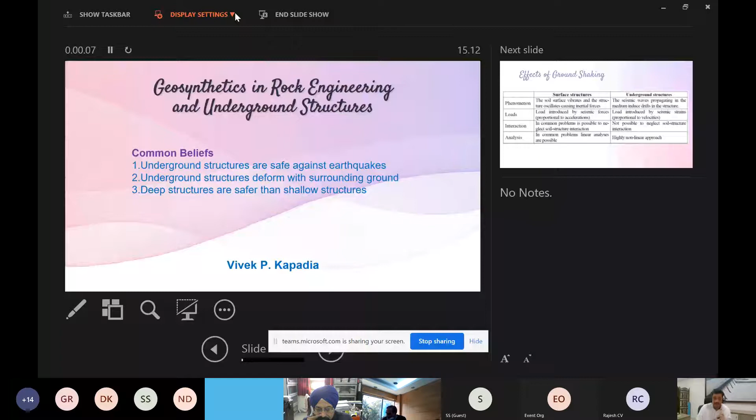And this is my full screen mode. The entire topic that has been given to me is very vast, and though I am not an authentic speaker on tunnel engineering—especially, I am a structural engineer with special experience in application of geosynthetics—I have done some work in tunneling, and that's why I will be able to share some of my experiences with you.

So in underground structures, the common beliefs are like this: underground structures are safe against earthquakes. Another belief we subscribe to is that underground structures deform with the supporting surrounding ground. And the third belief is that deep structures are safer than shallow structures. All these misbeliefs actually emerge from our codal provisions.

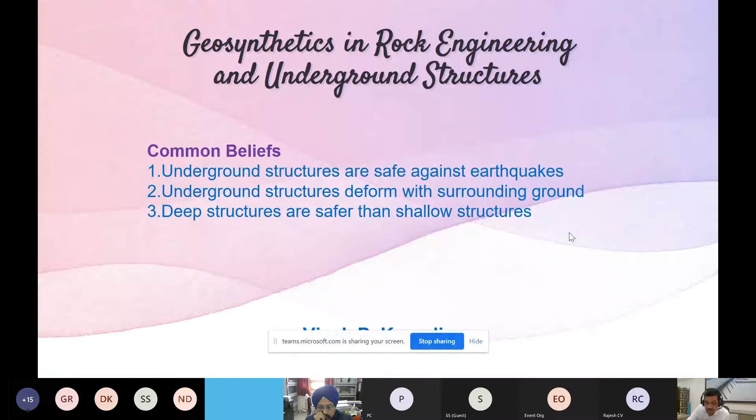Some of our Indian codes provide that buried structures are not required to be analyzed by dynamic methods, and these kinds of provisions give us wrong impressions, which is why these beliefs are nurtured in society. But actually speaking, the spirit of the code, when it says dynamic analysis is not needed, is that you should go for finite element analysis or pseudo-static analysis—these will work better for underground structures. That is the spirit of the IS code, but we don't take it the right way.

So here I am taking you through the journey of earthquakes and their effects on surface structures versus underground structures. The differences are very stark between structures lying on the surface of the earth and those buried in it. The phenomenon is that the soil surface vibrates and the structure oscillates, causing inertial forces—this is the net effect of earthquakes on surface-based structures. Whereas if the same structure is underground, seismic waves propagating in the medium induce drifts in the structure. So these are the two key differences.

From a load point of view, the load induced by seismic forces is proportional to acceleration, whereas the load induced by seismic strain is proportional to velocity. This, I think, is the most critical difference between the two. On the surface, the structure undergoes acceleration-based analysis, and when underground, it's velocity-based analysis. So this is the fundamental difference from an analysis point of view, and that's why the IS code says that when the structure is buried, it's better to go for pseudo-static or pseudo-dynamic methods.

From an interaction point of view, it's possible to neglect soil-structure interaction for structures resting on the ground, whereas it's not possible to neglect it when the structure is underground. From an analysis point of view, linear analysis is possible on the ground, whereas a highly nonlinear approach is required for buried or underground structures. Because of this nonlinearity, the code recommends pseudo-dynamic or pseudo-static analysis. This is the most important thing we need to understand.

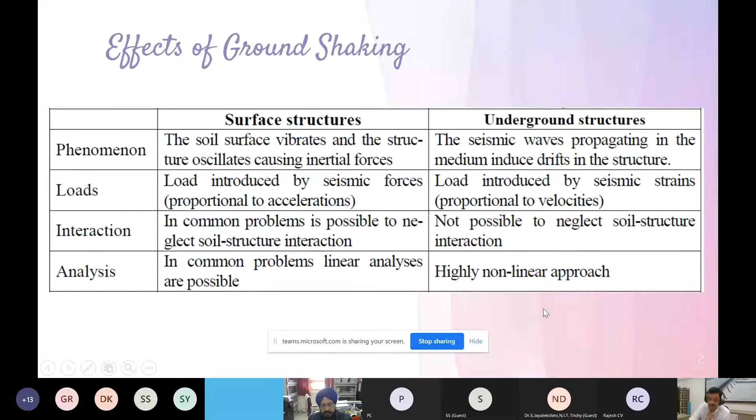So this is the disillusionment I was supposed to address at the outset. If we understand the first category of structures resting on the ground—rockfill dams and canals—these are made up of rocks. Let us start with the first set of slides now.

The geosynthetic membrane, how it is used in the rockfill dams. Usually in rockfill structures, the most critical aspect is seepage. What kind of seepage path you permit determines the base width of the rockfill dam. But we try our level best to ensure the reservoir side has some kind of sheath or impervious layer.

In the olden days, it was the concrete slab put on the face of the rockfill dam. Even dry masonry was done sometimes, but now we have replaced them completely, and we provide a geosynthetic membrane on the upstream or reservoir face. Similarly in the foundation, if imperviousness is required, we nowadays prefer basal reinforcement combined with geo reinforcement at the ground. That is how we ensure permeability is within the control or acceptability limit.

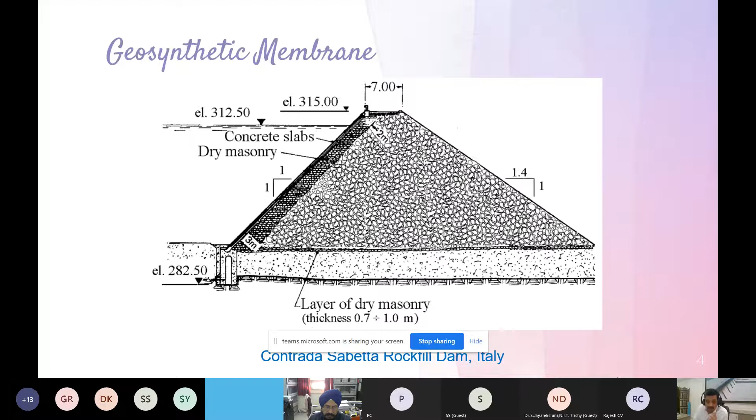This is a rockfill dam of Italy, pictured over here. The geosynthetic membrane, how it was provided, can be seen over here. The geosynthetic sheet has been covered with a concrete slab. The reason is the geosynthetic material is not very strong under UV exposure, so it was required to be covered. But the basic impermeability has been attained by the geosynthetic sheet.

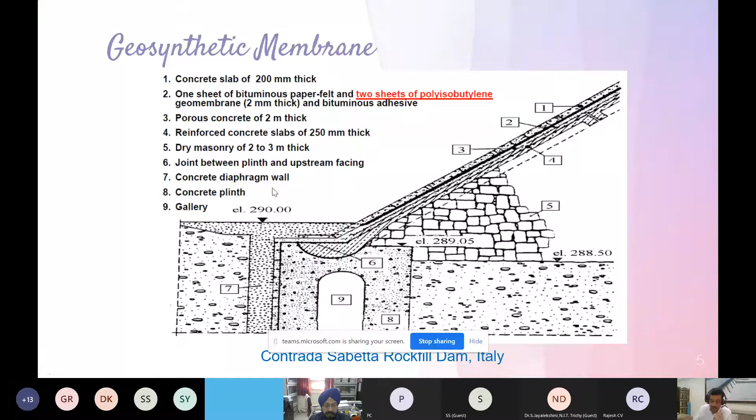In the olden days, the same material used was the bituminous sheet. Nowadays, we go for a polyisobutylene kind of sheet. Even HDPE is practiced for smaller dams, and for bigger dams we use PVCP kind of material, which is very effective.

In the rockfill dam, if we require a filter, we go for geosynthetic material nowadays. In the olden days, the practice was to use granular material like gritty material or pebbles. But now we go for the geosynthetic filter.

This is the Hans Strijdom Dam of South Africa, in which a PET kind of geotextile filter was used. With geotextile filters, both functions can be attained: filtration as well as drainage. That's why this dam has been standing for years together. It is a time-tested project with the application of geosynthetics in the rockfill dam.

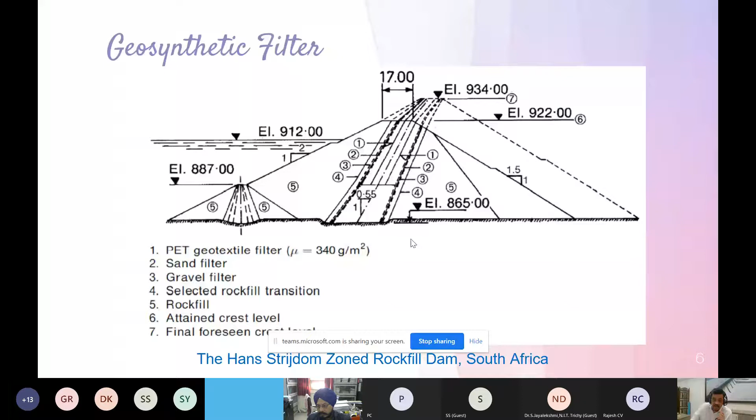Actually, the rock material is interlocked into the biaxial geogrid or the steel mesh, and that is how tension is attained into the steel mesh or biaxial geogrid. That is how we ensure the stability of the downstream side.

Then what is the net advantage? I shall take you to the next advantage in the subsequent slide, where I will show how earthquake resistant design of the structure is ensured with this kind of geo reinforcement mechanism. Sites susceptible to high magnitude earthquakes or low magnitude frequent earthquakes make rockfill dams extremely vulnerable. In that kind of situation, these reinforcements, be it of steel or polypropylene, are widely used. Even nowadays, polyester geogrids are also available for use in these kinds of structures.

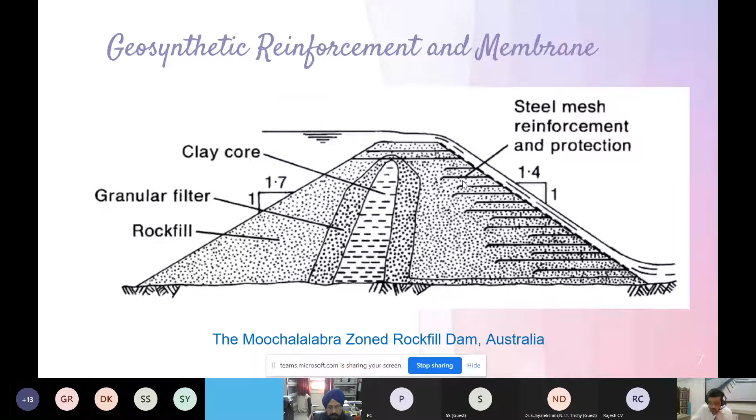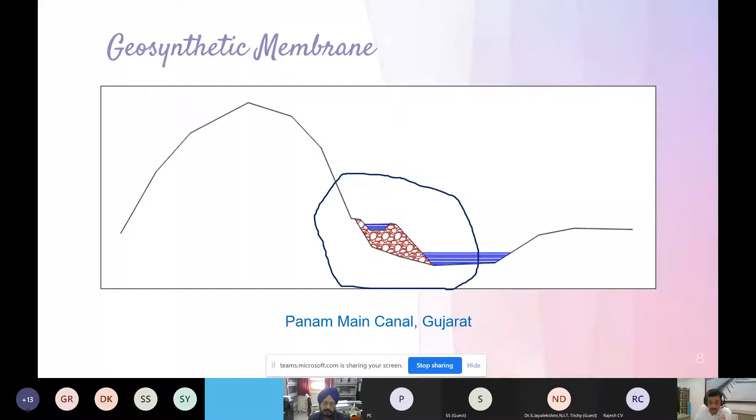I am taking you to a rockfill canal here. This is my own experience. You can see this entire rockfill canal abutting a mountain, and the material was taken from the same mountain. It is a high bank canal carrying water inside, with a significant discharge of about 35 cubic meters per second.

It is very big. Over a period of time, we observed that this entire rockfill mass, the canal, started developing voids inside, and that's why there was a big outflow over here. It was to the tune of 357 liters per second in a 100-meter stretch. So it was profuse percolation from the voids within the rock mass.

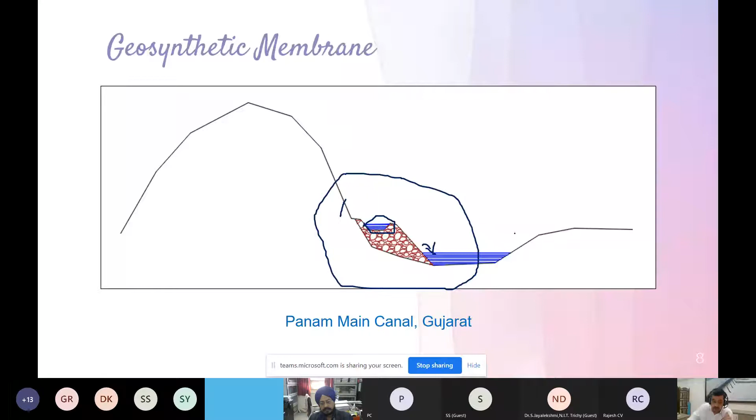So we went for geophysical testing. We found the water paths, and accordingly we chalked out our strategy. We simply put a geomembrane on the surface of the existing canal, and we put another layer of lining like this, and that is how we ensured it was a completely seepage-free canal.

Otherwise, it was a huge wastage of the water, and moreover, the stability of this outer slope was also endangered because of the path of the water developed within the embankment of the rock mass. So this is how the geosynthetic membranes work.

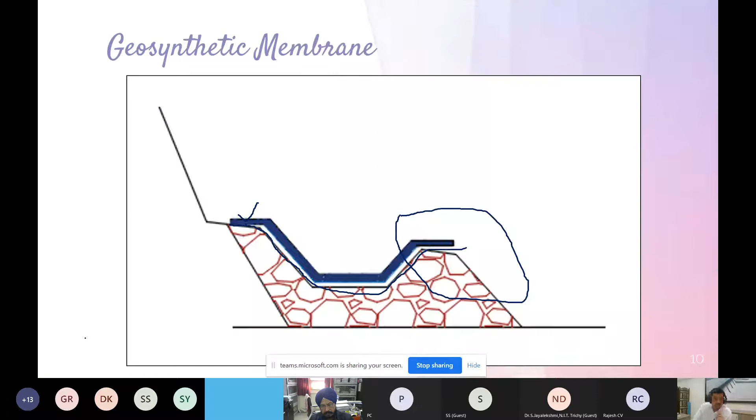Now I am taking you to the underground structures. Up till now, the discussion was focused on the structures above the soil mass or the ground. Underground structures are susceptible to high magnitude of deformations, and serviceability is a major concern in underground structures.

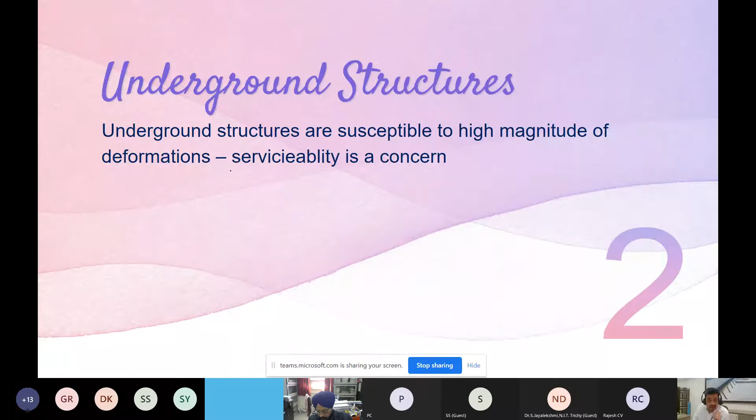I'm taking you to the crux of this matter. Suppose we have laid a buried service line, maybe a drainage line, a crude line, a gas line, or whatsoever. The mass above this pipeline, that is the soil mass or the rock mass, whatsoever the case be, this pipe is extremely dangerous.

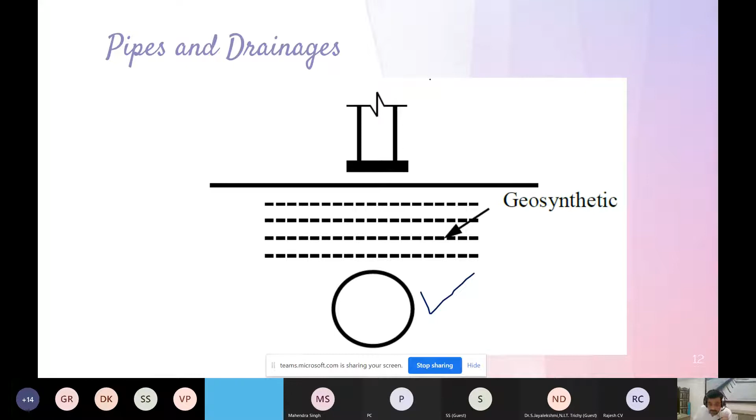When the load comes from the top, either vehicular load or any kind of punching load or so, then this pipe becomes extremely vulnerable if this soil mass is unable to take sufficient load and it simply succumbs to the load. In case it settles too much, then the pipe either cracks or it undergoes some kind of ovaling deformation. So this is a very dangerous kind of scenario.

So we put multiple layers of geosynthetic like these, and we reinforce the soil mass, and we ensure the performance and serviceability of this kind of buried pipeline. There are so many case studies nowadays in which the buried structure is protected by way of geo reinforcements on the soil.

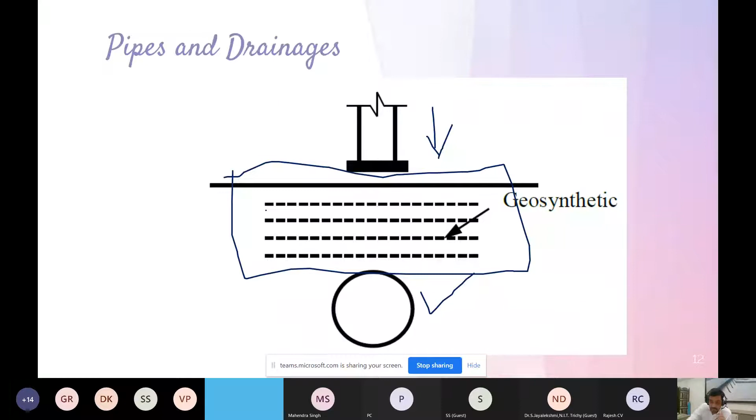I can show you one practical example in which the geosynthetic material was utilized to protect the serviceability and safety of these kind of conduits. One layer of geosynthetic was simply laid over that in one case. In the same pipeline, there were two layers of geosynthetics applied to understand how the behavior is improved by multiple layer geosynthetics. It was biaxial geogrid that was laid.

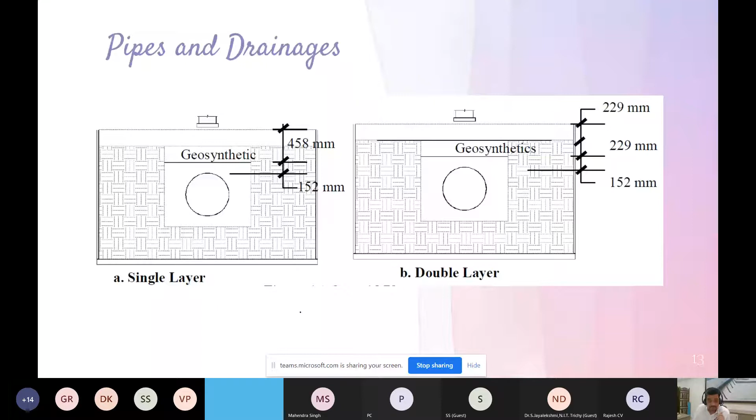The conclusion was there was a minor reduction of 11% in the settlement with a single layer of geo reinforcement, whereas with two layers, it was 38% reduction in the subsidence of the top load in the plate settlement. So you can see that it is not simply that you add one more layer and get a multiple reaction; it is a geometrically proportionated reaction. The reaction goes in the power value. So 11% to straight away 38%.

If you use the third grid on the soil mass at top, then you will get a reduction of say 56% or so. That is how you can improve the behavior of the filling material, and that will ensure the proper performance and serviceability of the buried service line.

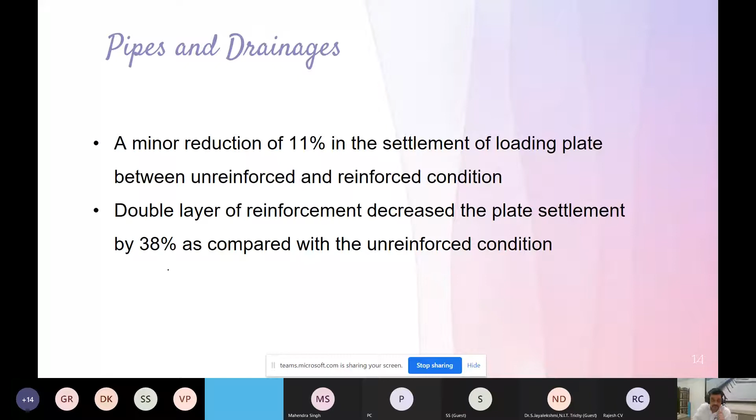In case you have to work in a waterlogged situation, the groundwater table has come right up to the top of the soil, and you cannot lay the pipeline. Then what nowadays people do is simply excavate the trench, lay down a proper geomembrane on the sides of the trench, fill the material with coarse aggregate like basalt or so, and lay the pipeline inside.

This material not only helps with workability in the presence of water, but also from a behavior point of view, these kind of trenches perform much better than the conventional dewatered trench and pipe laying situation. So this is the practical application of a very challenging kind of project. The cost of the pipe is not material, but the serviceability of the pipe is the real matter.

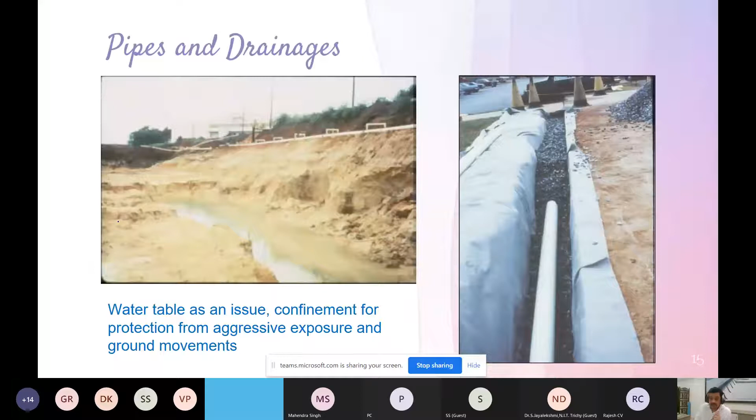Now, if I take you to the underground frame structure, maybe a metro railway station. If you go to Madras, there is an underground railway station of the metro line, and you can easily see here that the frame structure is looking like this. What kind of forces and equilibrium systems work?

This is the foundation reaction, and this is the backfill and traffic load atop it. And here are the live loads. And what you can see here are the sideway reactions on both sides. Even the moments are also there. This is the equilibrium diagram of this kind of planning.

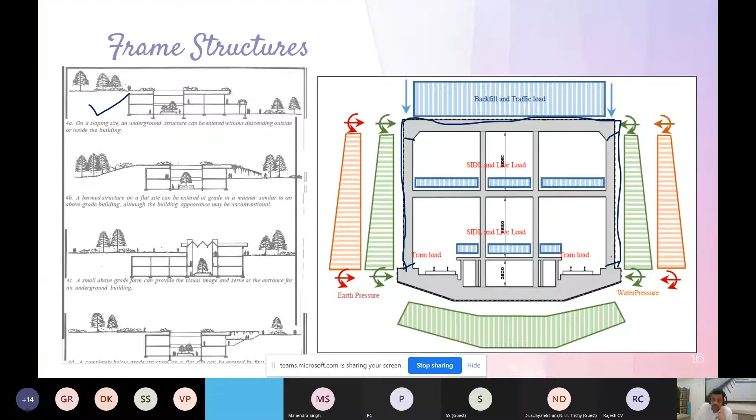But anyway, you can see that because of these kind of moments at the ends or the corners, there will be not only cold joint formation, but some kind of structural joinery developed over a period of time. This is called long-term plastic joints in the structures. So in order to prevent leakages from the surrounding soil, we simply wrap these kind of walls with the geomembrane, as I have shown here with the dotted line, and you can ensure that the performance of the structure or serviceability of the structure would be lifelong by this kind of application of geomembranes.

If you see the frame structure, there are sometimes challenges in the form of drainages from the outside. The groundwater table is also above. Sometimes the rainfall is so heavy that the water percolating from the ground will be haunting the performance of the structure, and that will also be mounting the water pressure from the surrounding. So this kind of water pressure you can see. The arrow I have drawn, I think I should change the color to make it visible.

This kind of water pressure is called lateral water pressure, developed on the walls of the structure. And this lateral pressure induces tremendous moment on the corners. In order to

ensure the safety of the structure, we provide a bottom drain like this. These bottom drains are also made up of geosynthetic materials. They are covered pipes. This covering material is the geosynthetic, and that is actually the filter material. And that is how the water is attracted by the drain. The water is not allowed to remain present over here for a long time, and that's why there is no long-term moment induction on the joint of the structure.

Sometimes we apply the geosynthetic in the base like this, and we fill up with gravelly material like this, and we allow the water straight away to go to the ground, disposing it somewhere else at a far off point. This is inclined drain, and this is the vertical drain just adjoining the wall, and that is how we protect underground structures with the help of geosynthetics. Especially in rocky grounds, these kind of drainage applications are very important.

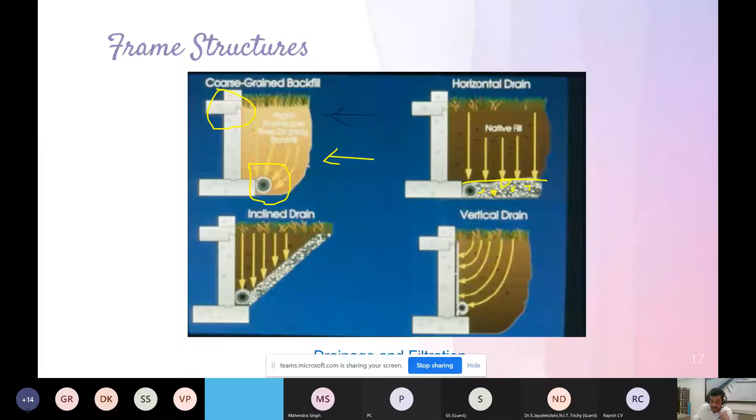The same way, we use geosynthetic as basal reinforcement in the foundation of these kind of frame structures. If the rock mass is not strong enough, or there are weak patches within the rock mass, sometimes shale or clay layer confined within consecutive rock mass, then we have to provide some kind of basal reinforcement in order to ensure permissible settlement within limits. So this is the application in foundation engineering, basal reinforcement, and that is how bridge abutments are made safe.

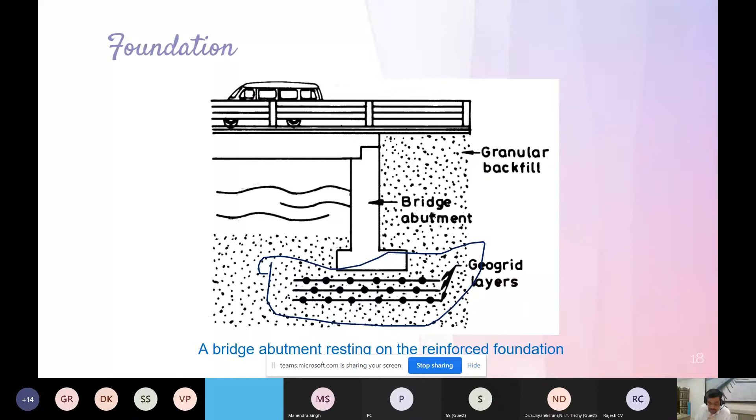In ponds or dug up water bodies, usually we have developed a perception that geomembranes are used to reduce the seepage rate. But another application is that in some places the inherent soil chloride pollutes the water within the water body or pond by infusing chloride into the water, that is called brackishness intrusion. In this kind of challenging soil, if you want to retain water for a long time, you can apply the geomembrane in the bottom and sides of the water body.

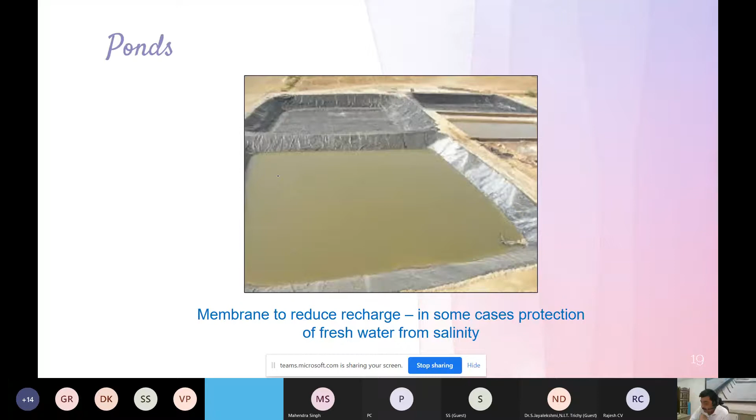You can store the water for the entire year. On the sea coast of India, there are several locations where brackish water intrusion has been a problem, and we sort out the problem using the geomembrane like this. This is again an application of geosynthetics in the underground structure.

Now I'm taking you to a very special application called the landfill application. In the landfill, all the solid waste is required to be buried, and we have to see that this solid waste does not come in contact with air, surrounding water, or soil, because this solid waste is extremely dangerous. Sometimes even nuclear waste is to be disposed like these.

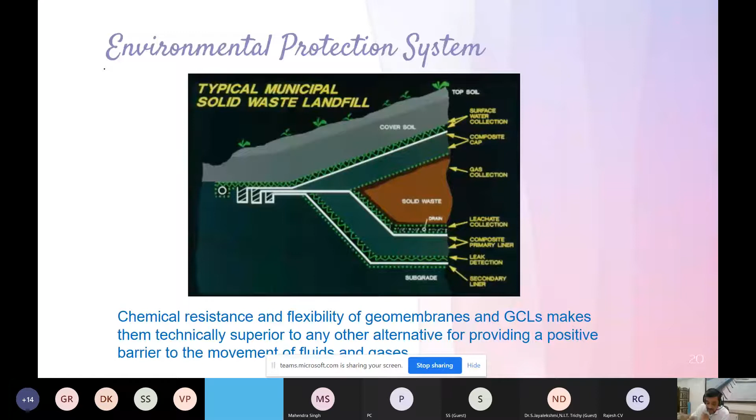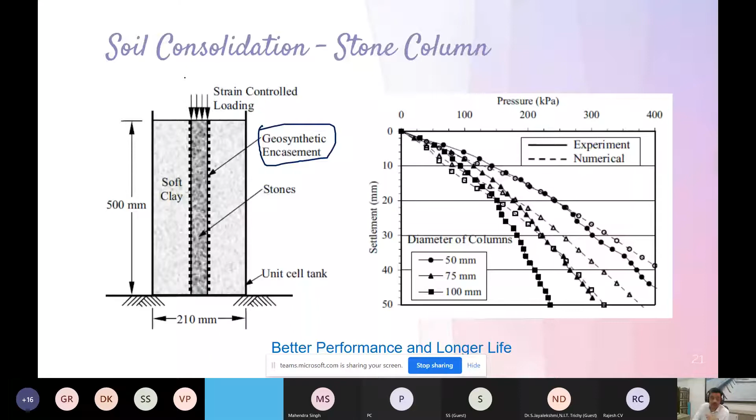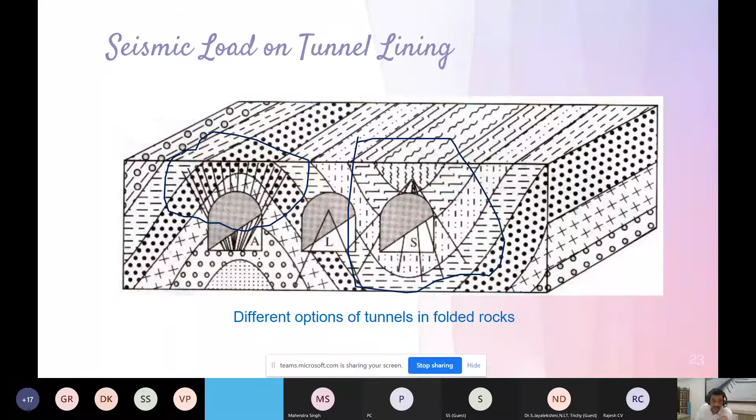There could be different situations depending on the waves generated by earthquakes at a particular location. If it is a site where primary waves are predominant, there will be compression lengthwise throughout the tunnel, and tension in some parts - this is basically axial compression and axial tension, a product of the primary wave of the quake.

If it is a shear wave, then there will be axial bending in the tunnel like these. And if there is some Rayleigh wave predominant in the quake, depending on your site situation, there will be some ovaling deformation, and accordingly shear and bending into the lining of the tunnel.

So even minor displacement may cause disruptions in the services. That is the real matter of concern while we design tunnels.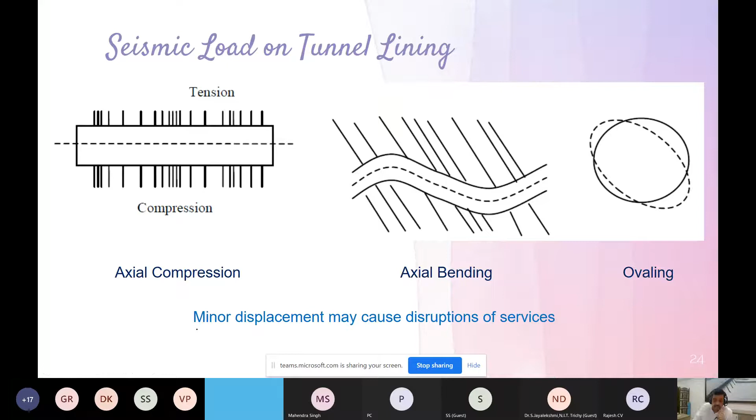So what do we do normally? We understand the variations around the tunnel in the rock mass on a short-term and long-term basis. The variation of the stress field as the face advances away from the point concerned in the tunnel is called the stand-up time, or the short-term variation.

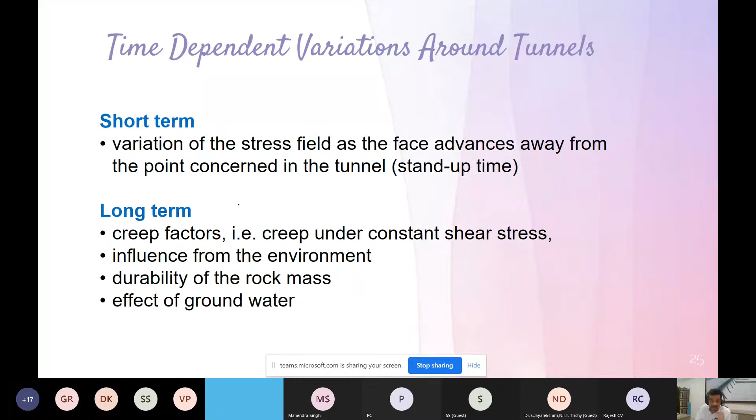In the long-term variation, we consider the creep, that is under constant shear stress, sometimes the influence from the environment, durability of the rock mass, and effect of the groundwater. All these are the long-term variations around the tunnels that we need to consider while designing.

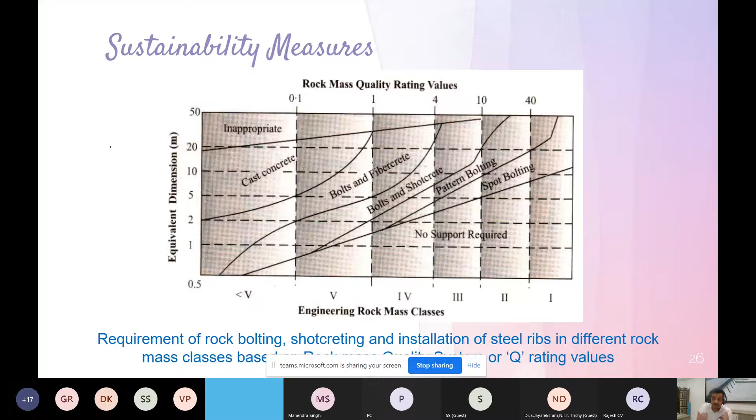This is a classical chart for the sustainability measures for the design of the lining material. The engineering rock mass is classified as 1, 2, 3, 4, 5, and on the y-axis we take the equivalent dimensions of different treatments. There are different zones: cast concrete or bolts and fibercrete, bolts and shotcrete, pattern bolting and spot bolting, and sometimes even for an extremely safe tunnel, no support is required. This is how we simplify the sustainability measures, but we have to take all these into consideration while designing the lining of the tunnel.

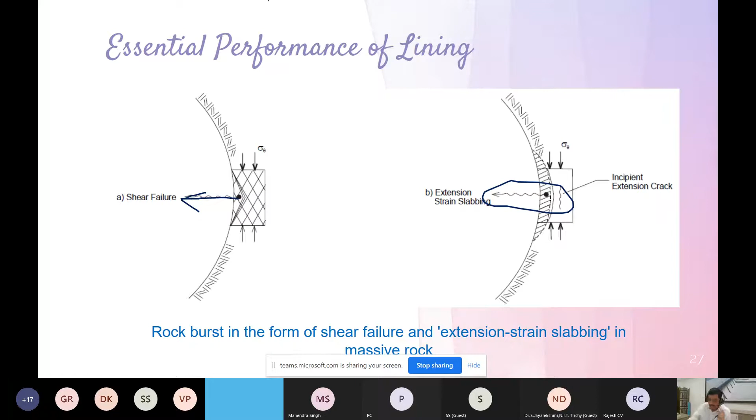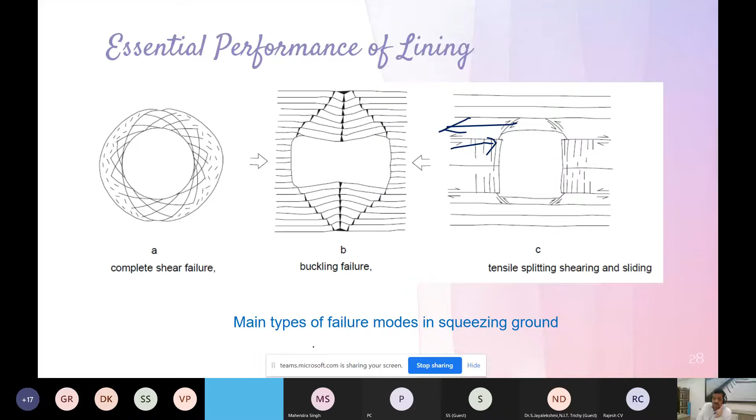So how do we tackle them? We understand the entire behavior of the lining, the response of the lining, in three categories: complete shear failure or buckling failure. Buckling means axial forces on the same axis, mostly compressive, so the deformation is not within the plane of the forces - this is called buckling. Then tensile splitting, called shearing and sliding - the forces are like this, and this is called shearing failure. So these are the main failure modes, the squeezing of the ground, and we design the lining for these three kinds of situations.

If we take a larger view of this situation, you can understand that whatever movement occurs in the rock mass is to be duly taken care of by confining that rock mass in the tunnel opening. So what is the confining agent or material? That is your lining itself, your composite lining. That is the only confining or supporting material to hold the rock mass in its place. This principle of confinement of rock support is considered, and this is called the overstressed element, for which we design the entire lining, because we don't know where the overstressed element will occur. So we design the entire lining for this kind of overstress anywhere in the tunnel section.

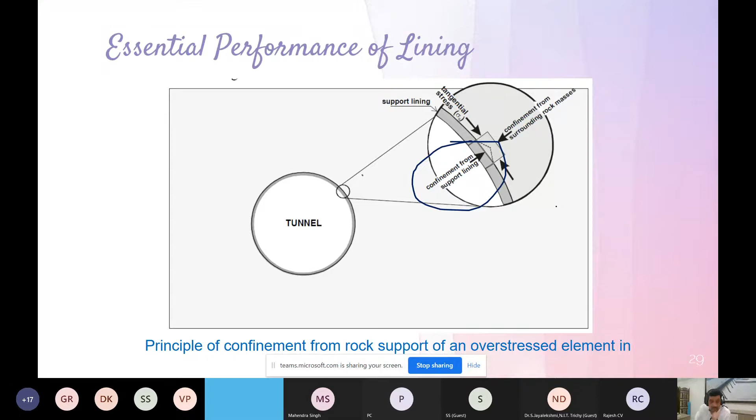For these kinds of situations, we design our material and we test our material.

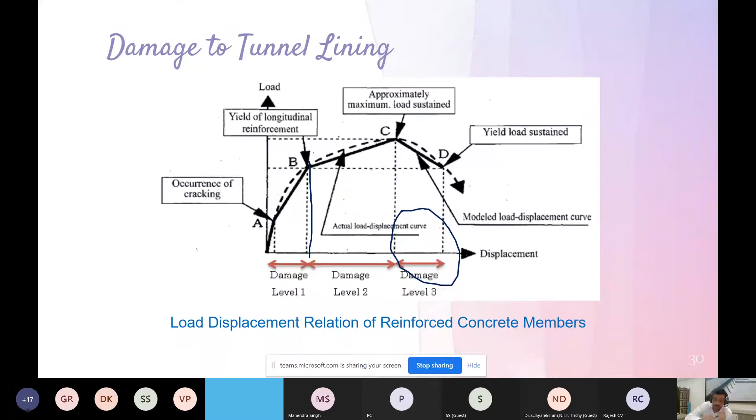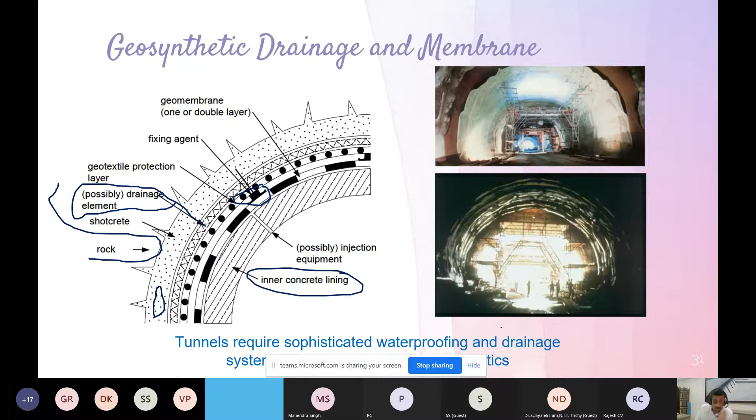Why waterproofing? So as to ensure the serviceability of the tunnel, to protect the electricity cables inside the tunnels. And why drainage? Because the drainage will facilitate a longer life to the rock mass around your tunnel. I shall come to this in detail in the subsequent slide.

This is typically the section showing fixation of the geomembranes and geotextile. This is a typical mechanism by which we use this material, duly covered by the shotcrete and the inner concrete liner. That is how the fastening system takes place for every tunnel, for every lining.

We go for designing special kinds of joineries and special kinds of materials, the geocomposites, and there could be different variations. But what are the benefits of geosynthetics here?

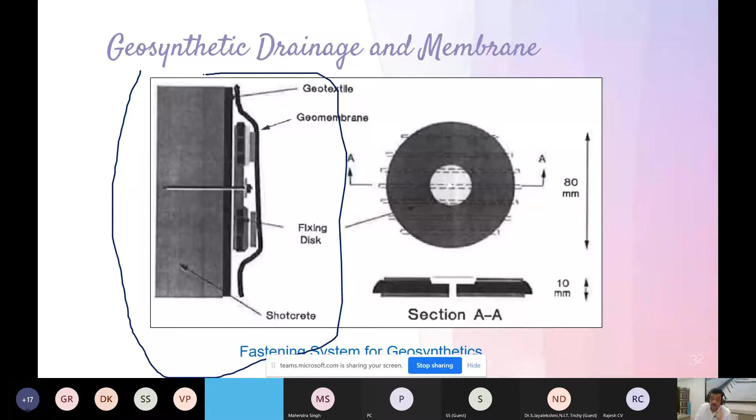The first benefit is that the surrounding rock mass does not remain in contact with water for a long time, and that's why it maintains the mechanical bond within, which is most important for the stability of the rock mass. Similarly, the bond between the shotcrete and the rock also remains unaffected because there is no water. This bond between the rock mass and shotcrete is again very important to allow the stress interaction between the natural material and our lining material. And the third benefit is that corrosion of the reinforcement within our tunnel liner remains far away.

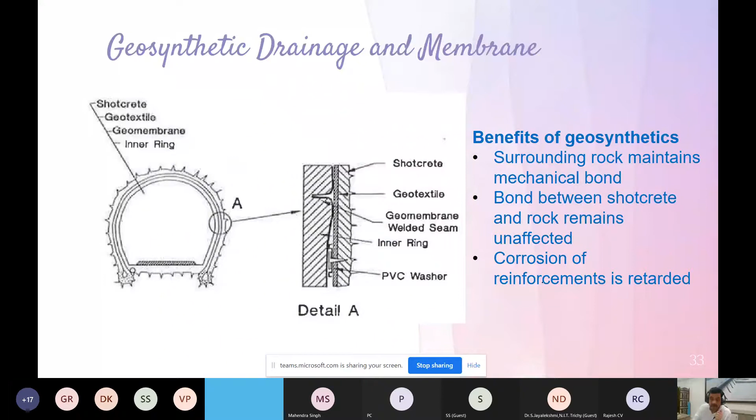So the rate of corrosion is retarded, and that is how we ensure the longevity of our concrete composite lining. These are the main benefits of application of geosynthetics, and that's why we widely use geosynthetics into our tunnel engineering nowadays.

This is my own example. I showed you once the canal, the High Level Canal of the Panam Dam, which was in a high embankment made up of the rockfill itself. This is the tunnel that takes water from the reservoir to the canal. This tunnel is a very long one, more than 800 meters long, and it has also been designed with the same kind of drainage design and reinforcement design.

I would say that geosynthetic is not actually to enhance the strength of the lining, but it enhances the context in which the strength of the lining remains intact. These are very loaded words of mine.

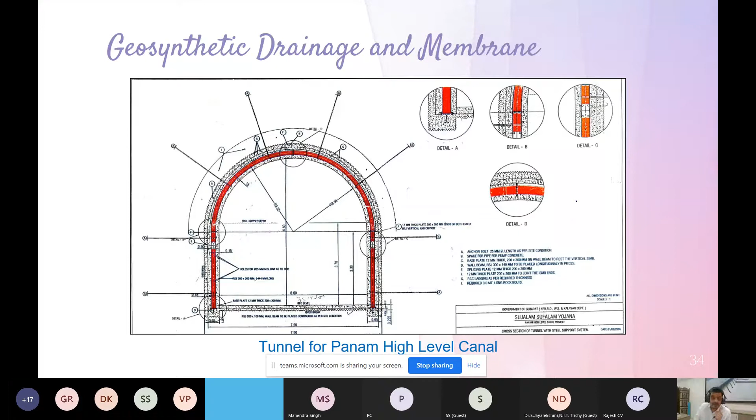So the properties of the geosynthetics for this purpose, the lining of the tunnel: the first is chemical resistance. It is to remain in contact with the calcium hydroxide in the groundwater, and that's why its design range for pH value is 2 to 13. Extreme alkaline material, extreme acidic material, both can be resisted by these kinds of geomembranes.

The same way, mechanical resistance: it has very high tensile strength and high elongation as well. Why does this give benefit? In case our tunnel lining has entered damage level 2, there will be plastic deformation and water will have a through permeation. But this mechanical resistance of the geotextile will not allow it to break, and that's why it will not give way to the water. So our performance and serviceability will remain intact, though we have entered the plastic deformation stage, that is damage level 2 of the shotcrete lining or fibercrete lining.

Then the hydraulic transmissivity: under a normal compressive loading of say 2 kPa, we keep the permeability within the limits of 8x10^-1 centimeter per second. For a 200 kPa load, which is extremely high, we can design the material to have permeability around 8x10^-2 centimeter per second, as good as impervious material.

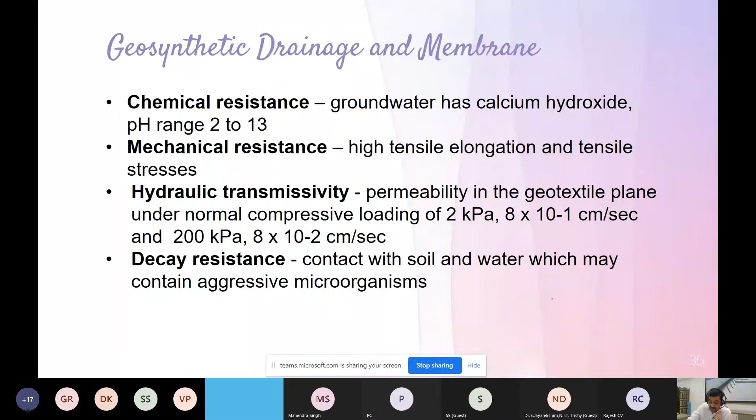So that is how our entire rock engineering is supported with the application of geosynthetics, and that is how we apply geosynthetics into rock engineering.